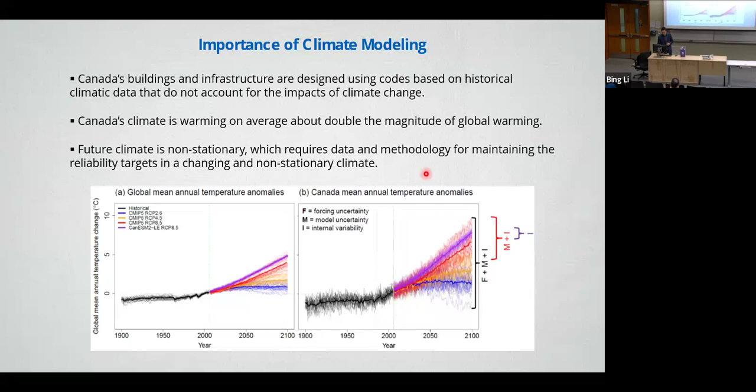Here we give another... let's see if I can have that. Probably not. Okay, never mind. Here are some other plots showing the temperature change globally. And also... oh, that works. Oh yes, I have video.

So here are some key points you can take away regarding why climate modeling is important in the context of preparing the community for a resilient future.

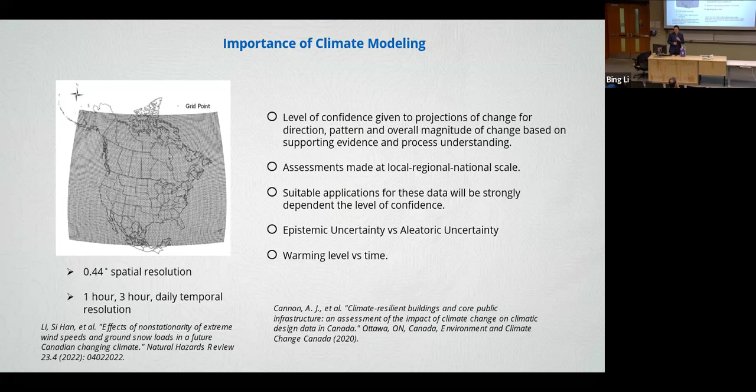Come back to the important topic of timing, and here are two things that give you a good sense of why timing for warming can become an important parameter.

As I mentioned, the left panel is the ERA5 recent observations in terms of global warming. This year is 2024, so this data only shows through 2023. What you can see is that the past winter average temperature anomaly has been exceeding 2 degrees Celsius, which is not good news. The interesting thing on the right side is cluster average predictions using different climate models across the entire world. The relevant period is centered around 2000, so this average temperature change is relative to 2000.

What we can see here is by 2000, our observations tell us we are averaging about 0.5 to 0.75 degree increase compared to pre-industry, where human activities caused by greenhouse emissions hadn't been injected into the atmosphere long enough to get the reactions. So keep that 0.5 in mind, because we're going to put this 0.5 on top of that. This basically means all these predictions give you a timeline to track or predict how global warming is going to progress.

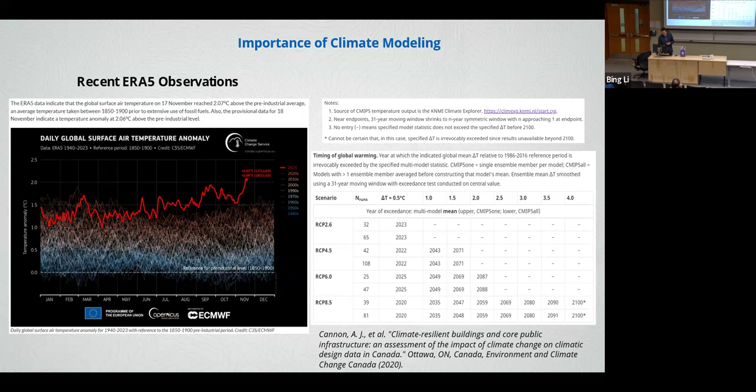Now, all this has established a baseline to tell you it is important for us to use climate modeling to consider climate change. Coming back to what matters for engineers, oftentimes we don't actually deal with these climate outputs at all. Or if we're using historical data, oftentimes that data is collected by meteorologists or others who are not engineers.

Let's review engineering practices, how we use historical data, and how we get all those design variables in a conventional practice. These plots give a general idea of how we use this data and how we project our loads, which are the natural forces imposed on all the structures we want to design and build.

Now, in conventional practice, we would collect all that data, which is just in this red square box. We think that's good enough, and we consider it stationary. What we call stationary is data whose characteristics don't change with time. Whatever you quantify in terms of mean, standard deviation, or 50-year return period or 100-year storm, will not change with time if you project into the future. This is exactly valid when you have stationary data.

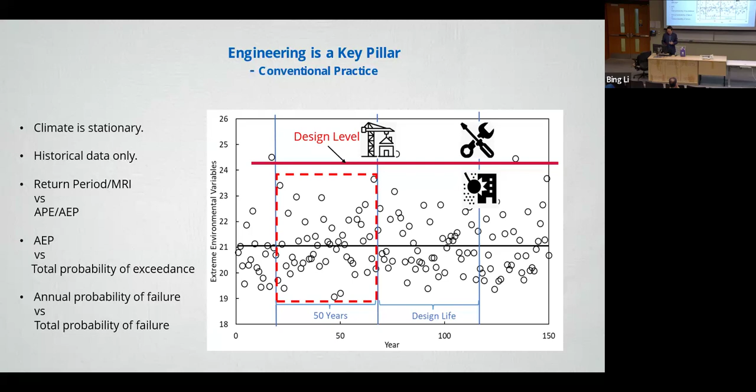Now, having a non-stationary climate caused by climate change gives you a lot of challenges, because you cannot use the conventional methodology anymore. The climate becomes a time-dependent or temperature-dependent variable, which can be interchangeably connected. Because of that, you cannot reliably use historical data to do the projection anymore. You have to employ climate projection instead. The future service life becomes a problem because you have to know when that target warming or target time will occur, so you can prepare your structure for it. And now you cannot use an annual exceedance probability anymore, because that changes all the time.

So you probably have to use either the maximum annual exceedance probability or the maximum lifetime exceedance probability to prepare your infrastructure. Now, similarly, you cannot use annual probability of failure anymore because that becomes a changing variable. You probably have to use maximum annual probability of failure, or maximum total probability of failure throughout the entire service life of this system.

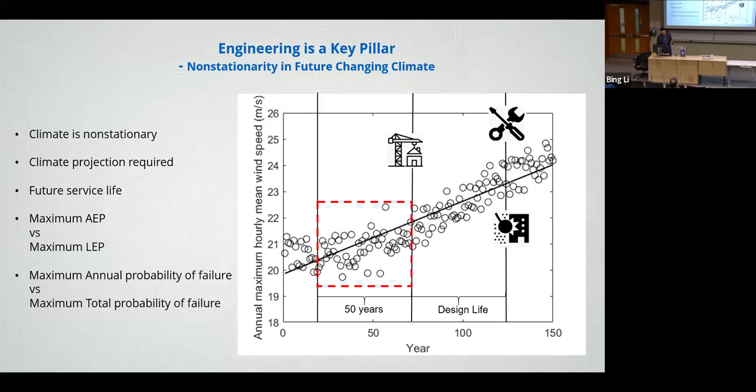Before we get into non-stationarity, there's one thing we have been working on and proposed an update for the National Building Code of Canada: a transition from what we call a uniform hazard approach to a uniform risk approach. This approach has actually been used by many other codes, like the ASCE building codes, and Australian and New Zealand building codes.

So what you do is when you don't have that uniform risk approach implemented, you would always have a so-called load factor. If you do all of your design based on the code approach - wind design, flat design, or seismic design - you will always have a load factor. Engineers like using factors to quantify the uncertainties, to envelope the uncertainties that are out of our control. You have a lot of uncertainties throughout your design, construction, and maintenance, etc. You use a factor trying to envelope those uncertainties that are not exactly controllable by engineers. But what we found in past research I collaborated on with my former supervisor, Dr. Hanping Hong—

and also a following study that he did with his research group, is basically the same conclusion: using a single load factor across the entire Canada, with a large variability of climate, actually gives you a very large range of reliability index. The reliability index has been used for many years in the engineering community to communicate structural safety. Oftentimes we're using 3.0 as a target. But as you can see from these plots, now considering the variability across entire Canada, that has a very large variability of your reliability index. It really depends on where you're going to build your structure. You might hit it, you might underestimate it, or you might overshoot it.

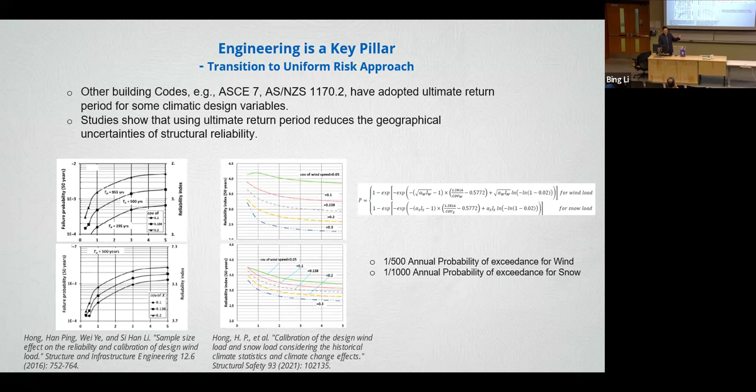Now, however, if we actually reduce that load factor, but use a different return period or exceedance probability, basically scaling it up a little bit higher - currently we're using a 50-year return period - if we go up to 500-year for wind or 1,000-year for snow, what you can see is that the uncertainty becomes very, very small. Now it's only about 0.1 or 0.2 going up and down around the target. If you convert that back to the probability of failure, it becomes even smaller - probably very well within engineering accuracy that we can control. So that's one thing that has been proposed: moving from uniform hazard to uniform risk.

Now let's come back to the climate again. The one thing I have mentioned is we cannot continuously use historical data anymore. And now the immediate question is, can we use historical data to detect any trend that has been caused by climate change, and use that as a guidance to project that trend into the future?

This is one of the efforts we have made, taking about 20 cities across Canada, collecting all those wind speed data, doing the quality control and standardization of the wind speed, and then doing some trend detection analysis to understand whether in the past 50 years climate change has affected the real observations significantly enough so we can use that trend as a guidance.

Now you can see the linear fit basically indicates some trends, but that doesn't mean whenever it's not a straight horizontal flat line, it has a trend affected by climate change. It only shows you might have a linear trend, and you still have to do some statistical significance test. That goes back to the two uncertainties I just mentioned: one is epistemic uncertainty, the other is aleatory uncertainty. One is talking about whether you have enough samples to tell this is a statistically significant observation. The other only tells whether you have enough knowledge to understand what you have observed is true.

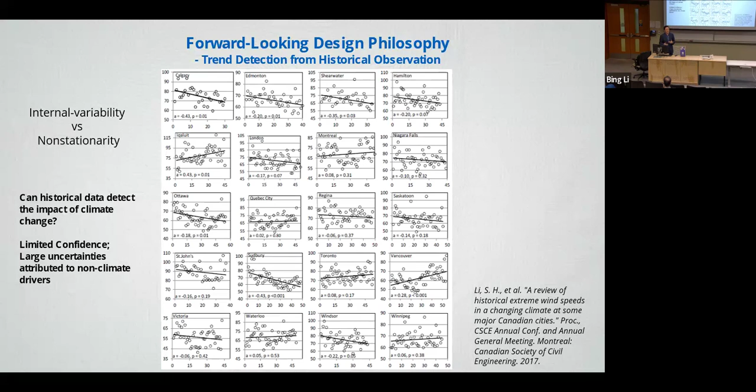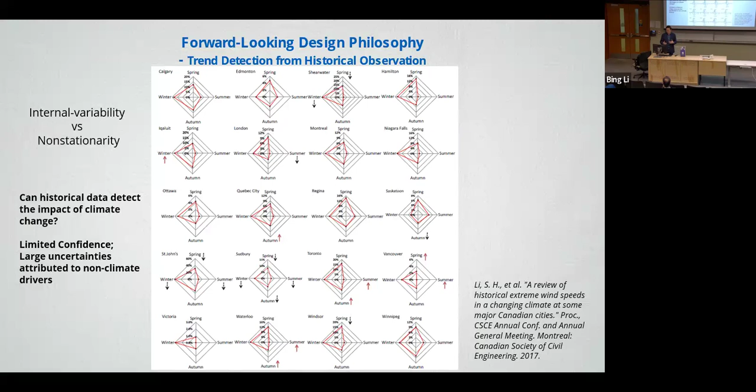Now, if anything cannot pass the statistical test, it's basically saying it's less likely caused by climate change - it might be caused by something else: data measurement issues, anemometer changes, terrain surrounding changes, and something else. We have also done work to see whether the change has seasonal variability and whether that change varies with different directions.

We can tell there are some changes from historical records. But what we found is even more challenging: it's hard to say or conclude confidently that those changes are caused by climate change, because there are so many other factors affecting it, and it's very hard to entirely filter out those causes.

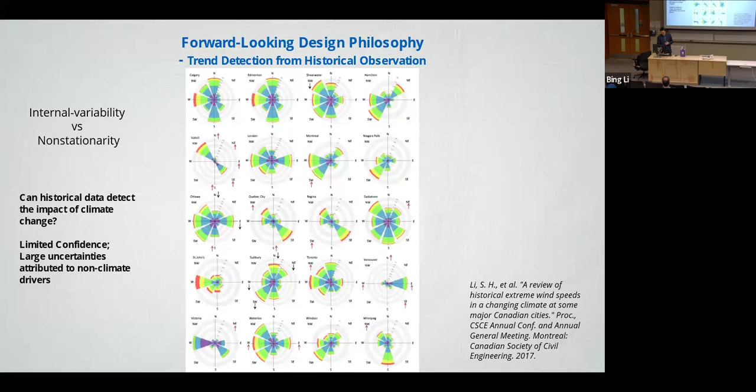Because of that, we now have to employ climate modeling outputs. This is one of the climate modeling outputs we got from Environment and Climate Change Canada during that large national research initiative. I gave several examples on the right, and those are the three simulations.

You can see from top to down. There are locations that just don't have climate change impact at all. And the bottom one shows one of the obvious trends where the impact of climate change is significant, so you would have to consider the non-stationary climate.

All those color plots in the top panels show the trend detected for extreme wind speed. On the left is the mean detected trend, and on the right is the standard deviation of that detected trend. The bottom plots show the trend detected for ground snow, with the right plot again indicating the standard deviation.

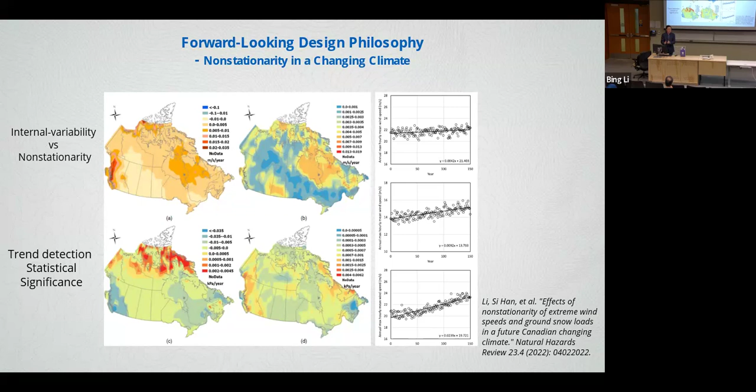So you can see that even when we get climate change models, we still have large uncertainty in the model. The standard deviation for some locations is quite large, which basically means you shouldn't just get one climate simulation and use that for your practice, because the climate model itself generates a lot of uncertainty.

Coming back to what are the key parameters when you do a forward-looking design philosophy. The first, of course, is you have to use climate projections, but you would still have to use historical observations as your baseline.

Now two periods become important. In the past, we didn't really care too much about the future date, although there's always an implicit assumption about how long our structures would serve. Often buildings assume about 50 years of service life, ranging to 75 or 100 year service lives, but other than that, it's not very sensitive in terms of how you quantify your design loads.

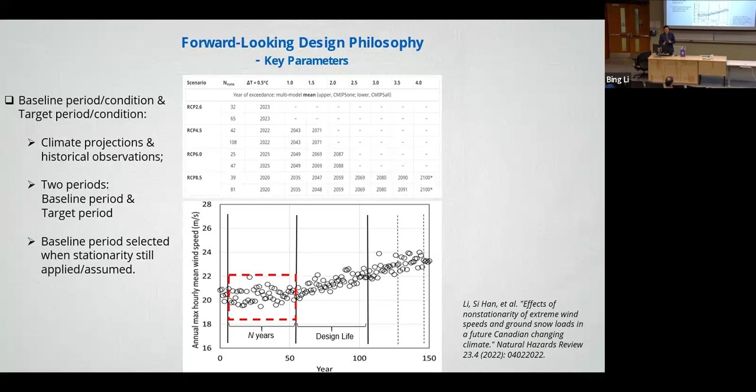You really don't care whether the capacity of your structure is going to deteriorate throughout the design life due to environmental and other loads. If you assume your capacity is the same, your design loads won't need to change at all.

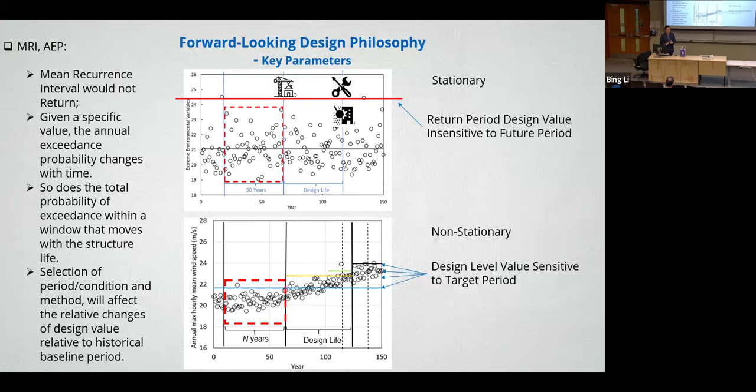Depending on which time and what methodology you picked, you can have one, two, three, four or more design values to use. If you do not clearly define a future condition, either depending on warming or depending on when you want your structure to stand and for how long, then that becomes your engineering and design challenge.

Again, from a purely reliability analysis point of view, it becomes challenging. These plots represent the calculation of total probability of failure, shown on the left panel, and also the annual probability of failure on the right panel.

The horizontal axis represents the significance of non-stationarity. I've plotted two curves here: the bottom one representing 10 years starting from the start of your service life, and the upper one representing 50 years from the start of your service life. You can see there's a significant shift in the probability of failure.

The bottom plots probably give a better indication. The solid black line shows we're trying to maintain the safety or reliability of our structure. All the dashed lines indicate what happens if you do not prepare your structure for a future climate—this is the probability of failure you'd expect in the future throughout the design life. You can see the magnitude of increase or decrease in safety is significant.

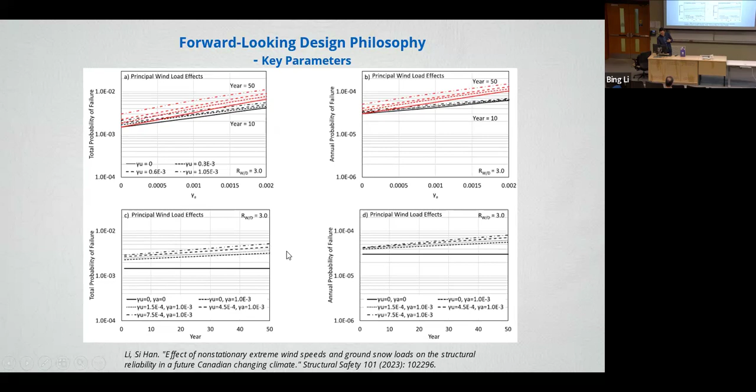Coming back to see, now we know we have a challenge in engineering practices, what are we going to do with it? There's a couple of methodologies proposed in the literature. Overall, they're basically just two groups, because many of them are calling different names, but they're actually quite comparable, ending up with very similar results.

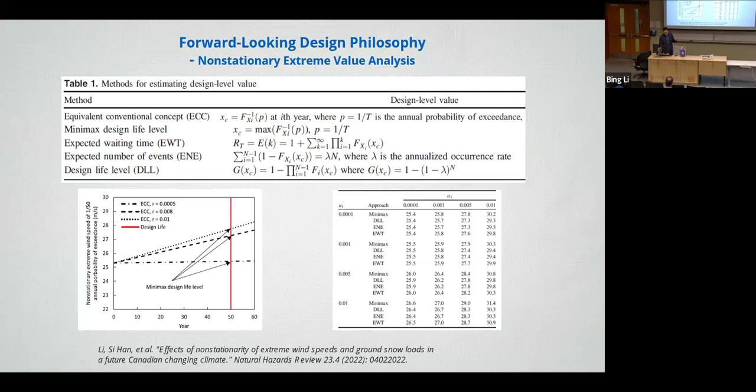One example is here, we pulled them together and calculated based on different non-stationarity. We found most of them are the same, except that there are two methodologies with a little bit different design philosophies. One we call the min-max design life level, another one is design life level, which is DLL. Here's a graphic indication of how you do your design based on these two different methodologies.

This curve represents the probability distribution. Now, because it is becoming a changing climate, your probability distribution changes with time as well. Using this min-max approach, what you have to consider is you have to define the service life, or end of your service life. Within that period, you now have a different probability, and you have to select your design value to ensure the maximum exceedance of that probability is maintained to your target level. This is what we call the min-max. So it's not necessarily happening by the last year of your design life because it's totally random. In some cases, you might actually get an increase of loads and then a decrease of the loads.

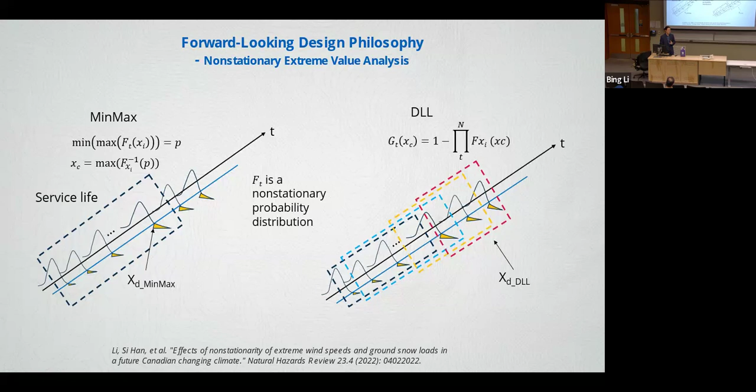Now, the DLL approach is a little bit more complex, but somewhat more flexible. It gives you the selection of your window. It's not calculating the annual exceedance probability in that window, it's actually calculating the accumulated probability exceedance, or the accumulated total probability of failure within that window. That means this window can go along with the true, actual life of your structure. Getting close to the original design life, you can adjust that window to see how many years of remaining service life you still want. But again, because it's more complicated, in some circumstances it might not be fully practically applicable because there are so many things you need to consider.

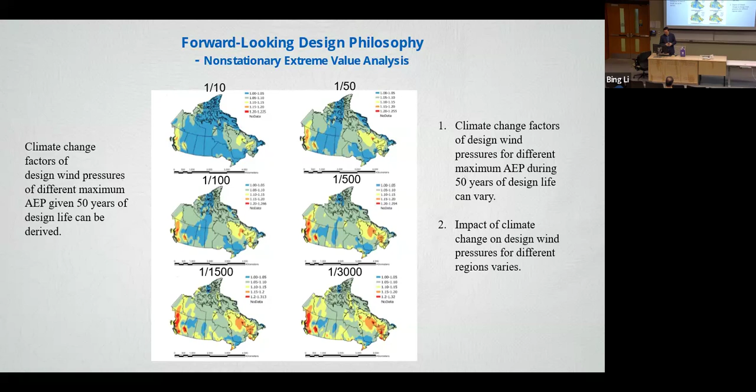Based on all these approaches, one can develop climate change factors to scale up your design values, based on different exceedance probability and assumed service life. Similarly, you can do wind, snow, and other things.

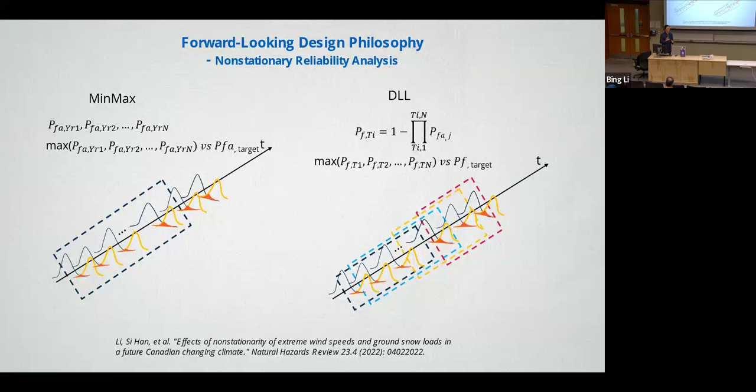But generally, it has a similar idea, whether you have to select a service life to quantify or target a probability of exceedance or probability of failure, and how you move your window to understand what is the total failure within that targeted period. Here are two examples to see if we design the structure to consider the forward-looking design values incorporating climate change, how your probability of failure is going to look like.

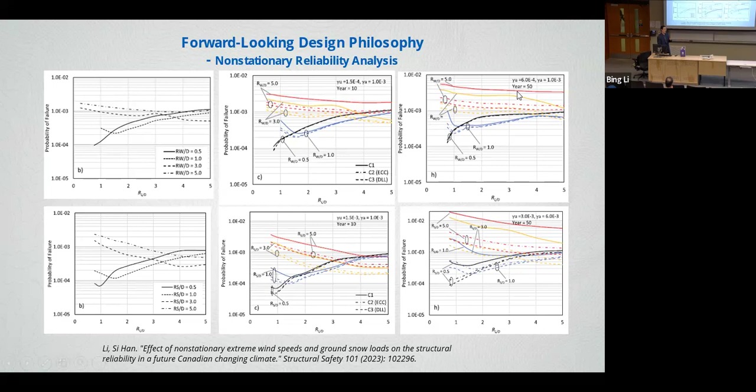If you compare the top dashed curve to the solid right curve, you can see that's a significant change when we do not consider the climate change impact. By the end of your service life, under that climate change impact scenario, you could have a significant impact on the safety of your infrastructure.

But if you incorporate climate change into your design, which goes back to this right dashed line, now it's basically getting back to the target value you're preparing for.

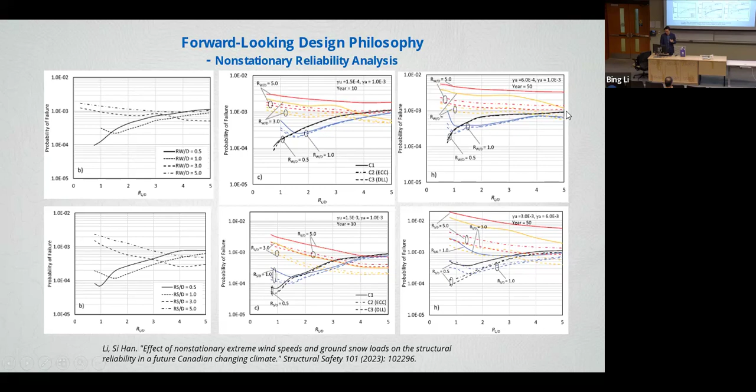Given all this evidence and different methodologies and uncertainties in the climate modeling, and suggestions from the climate modeling communities, we now have recommended regional climate change scaling factors for wind and snow loads for different provinces. Those values, as demonstrated by the previous slides, if incorporated into your design values, the future climate impact can be well under control for the structures and achieve that climate resilience.

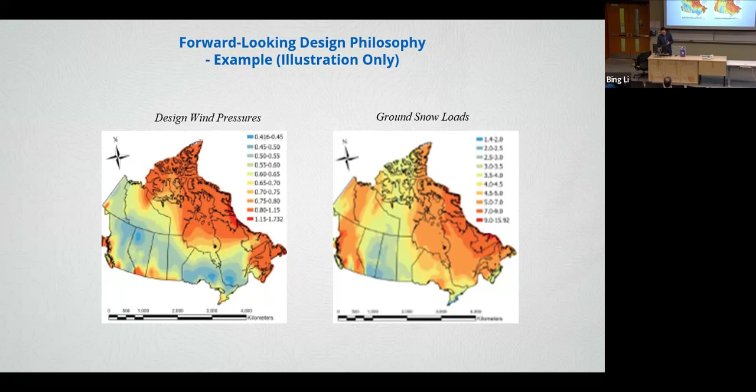Here are just two maps shown for illustration purposes only, because there's still something ongoing under development by Environment Canada. But these generally indicate the geographic distribution of the design wind pressure and ground snow loads if you incorporate the climate change factor into consideration.

Code as a minimum design requirement often covers generic design cases, but as engineers, you're always dealing with very specific design cases that code might not be well prepared for when designing your structures.

One thing we've shown is transforming from the uniform hazard to uniform risk approach, you can reduce uncertainty of the reliability index. But even that still hasn't got a truly uniform risk, because your reliability index still changes with the climate. So another thing one can do is, on top of that, add another factor — a climate variability factor — to fully incorporate the variability of the climate and get true uniform risk or target reliability-based design.

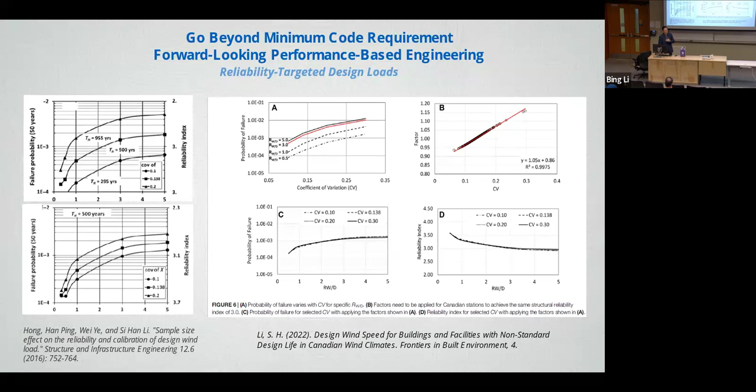For this cycle, I don't think this is going to happen in the National Building Code of Canada. But there's a good example in the US — the ASCE 7-22 snow loads has used a similar approach, using a target reliability-based design value, reaching the same reliability across the entire states. So those loads will vary location by location, but you're going to reach the same reliability targets.

The second thing is the service life. Whether you assume it's 50 years, 75 years, 80 years, or some other number, it is an assumption, and it could change with different conditions. Some structures you really want to stand there for a long time, like residential houses, etc. — you probably want it to stand there for 50 years.

If it is a commercial building, a very expensive commercial building in a city center like Toronto, you probably don't want to tear it down after 50 years. You probably want it to stand for 80, 100, or even 150 years for historical buildings. In that case, you would have to consider your design life as an explicit parameter in how you prepare for it, and there are some other methodologies you can use.

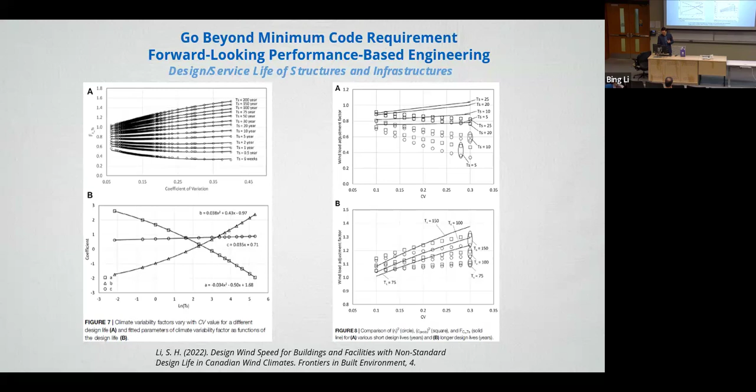Lastly, for wind engineering, there's always an implicit assumption. We always assume a 1 hour duration windstorm, and we prepare for the peak responses during that hour. But a study I did with Greg Kopp found that the duration can be longer depending on what return period of wind speed you're talking about. This hasn't been fully explored in the engineering field, but it can be an important parameter, especially if you're doing performance-based design, pushing your design capacity from elasticity to inelasticity.

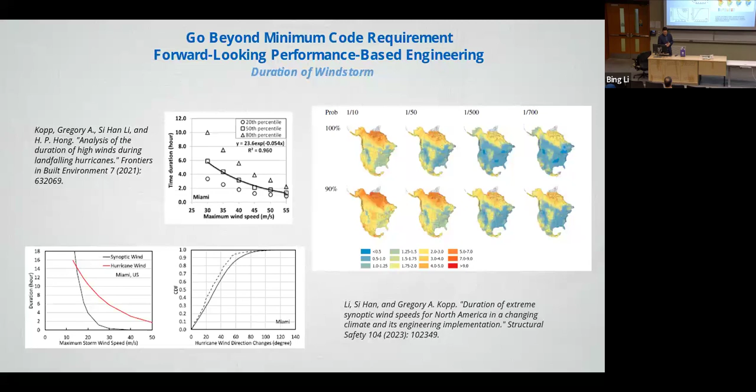And lastly, climate change doesn't only affect structure safety, it also affects sustainability. You've probably seen a lot of news about renewable resources, wind energy being a great tool for mitigation to reduce greenhouse emissions, but it itself will also be affected by climate change. So you have to balance sustainability, adaptation, and resilience, because they're interaffected.

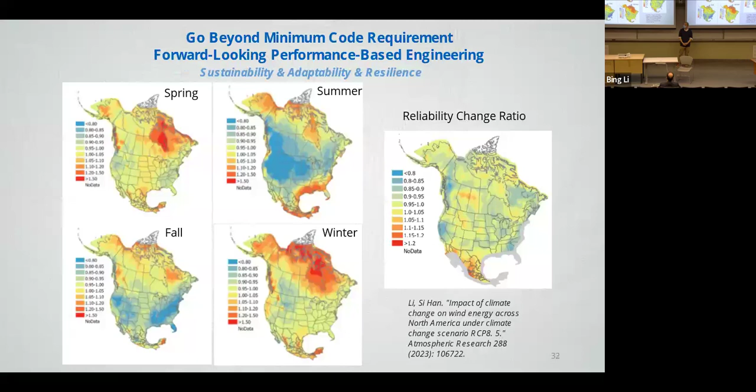The first one is, you as an expert in studying climate change modeling, do you think it's better to consider countrywide studying of climate change, for example for updating the building codes, or should we consider regional study? The next question is, is it better to consider aging, for example for buildings—should we consider the climate change impact on the code or on the building in the future? So should we consider the aging as well?

Great questions. Let me comment on the first one based on my personal view. Whether we use climate change factors or quantify climate change impact at a larger scale, like province level or national level, or at local level—I guess this really depends. Based on the consensus we have throughout these practices, it depends on what kind of climate variable we're dealing with. If the scientific confidence is enough—like the scientific community has a very well understood understanding about temperature, so that has very high confidence, we know where it's going to go—in that case, at the local level it's probably very well established and should be considered.

Other extreme variables are less studied, which basically means although we have the variables, we just don't have very well established publications or reports or cross references beyond this region. Do we really have high confidence about, let's say, storm wind, not only within Canada but outside of Canada? Has the scientific and engineering community well understood all these phenomena using climate modeling? If that confidence is high enough, I think at local scale it's reliable. But if that confidence isn't there, people can still do that, but there's potential risk and large uncertainties you'd have to take.